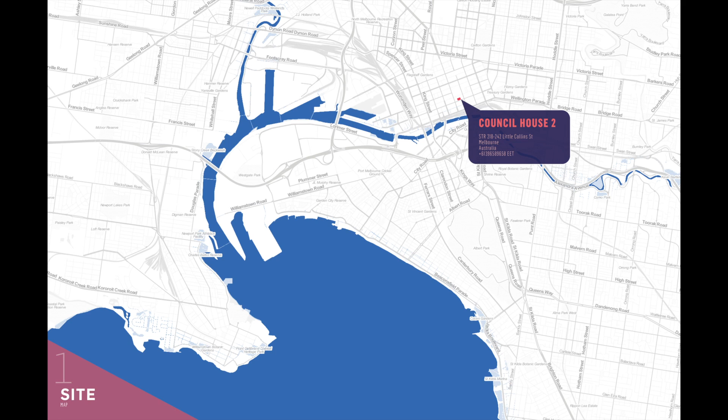Council House 2 is geographically located on the southern coast of Australia. It is located 40 miles away from the Southern Ocean. The building is also in the heart of Melbourne City Centre. It is in an area of Melbourne in Victoria, Australia.

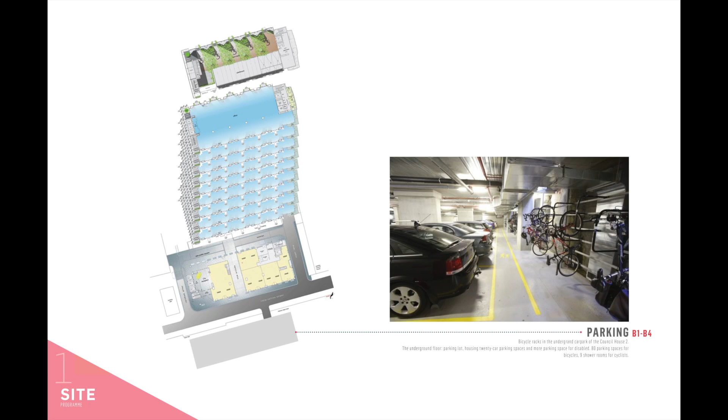The underground floor is programmed with a parking lot, housing 20 car parking spaces and 1 parking space for disabled, 80 parking spaces for bicycles, and 9 shower rooms for cyclists. Retail stores and lobbies are located on the first floor. The second to the 10th floor is Government Workers' Office. There's a roof terrace on the top of the building.

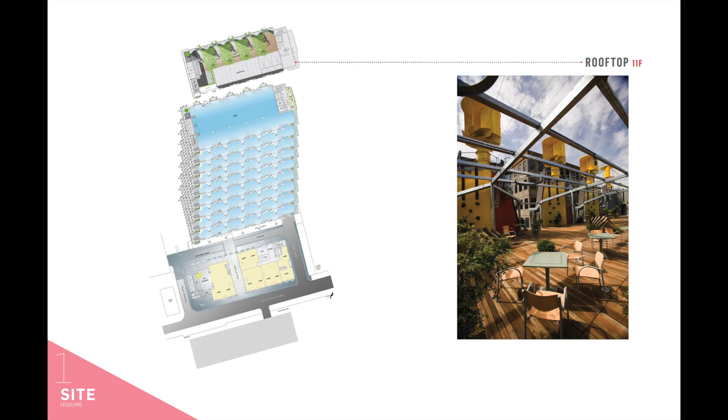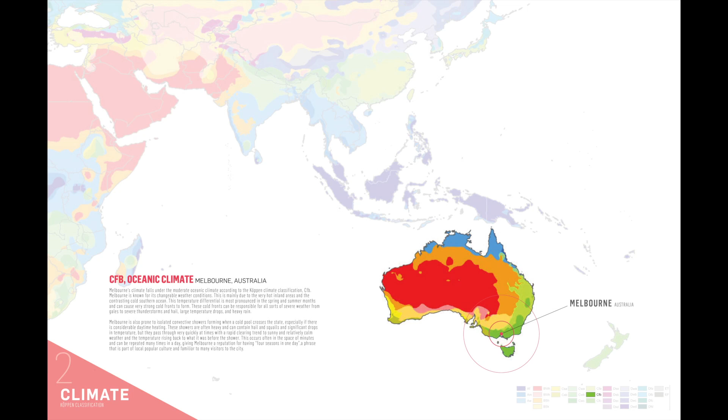Melbourne falls under the moderate oceanic climate according to the Köppen classification and is well known for its changeable weather conditions. This temperature differential is most pronounced in the spring and summer months and can cause very strong cold fronts to form. These cold fronts can be responsible for all sorts of severe weather, from gales to severe thunderstorms and hail, large temperature drops, and heavy rain.

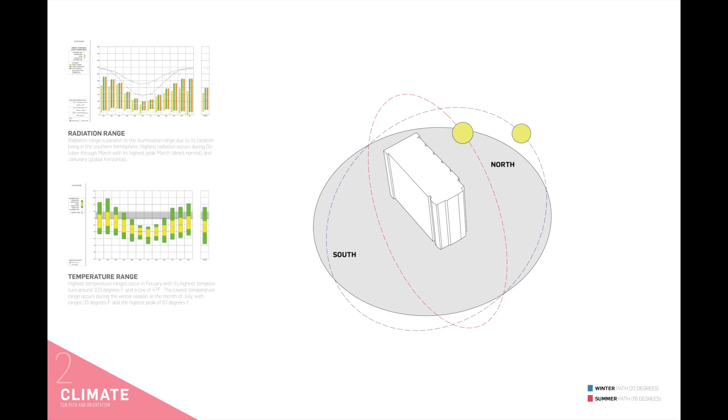These showers are often heavy and can contain hail and squalls and significant drops in temperature, but they pass through very quickly at times with a rapid clearing trend to sunny and relatively calm weather, and the temperature rising back to what it was before the shower. This often occurs in the space of minutes and can be repeated many times in a day, giving Melbourne a reputation for having 4 seasons in one day.

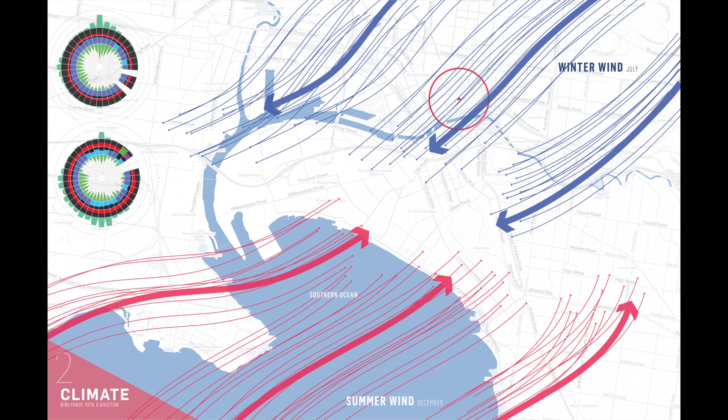The sun positions at 9 a.m. and 3 p.m. in Melbourne in midwinter. The wind direction is different by season. In winter, the wind comes from the continent, while in summer, the wind comes from the sea, from the south.

CH2 has been designed to be a highly energy efficient and sustainable building, with all its systems and spaces forming an interconnected and interrelated whole. Much like a living organism, the building requires all of its limbs and organs to fully function. The elements of the thermally efficient design concept for CH2 are stimulated by the termite mound.

In a termite mound, the cool wind is drawn into the base of the mound via channels, and the coolth is stored using wet soil. As the air warms, it flows upwards and out of the mound via chimney. The termite mounds are able to keep a stable temperature within, allowing the termites an ideal temperature for harvesting despite the large variations in temperature outside.

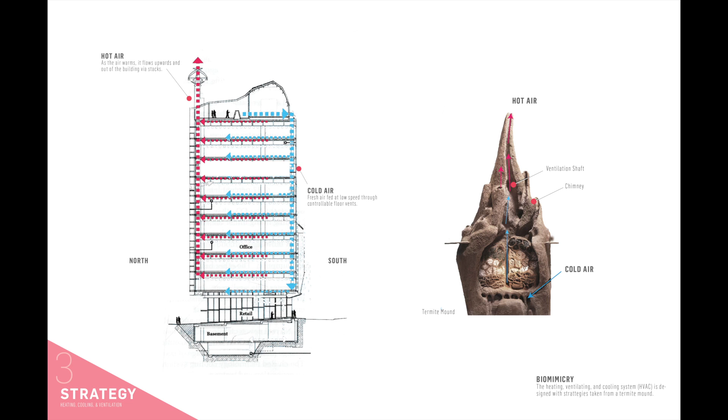In CH2, the cold air is drawn into the building via south stacks. The coolth is stored in the mass ceilings. When the air is warmed, it is drawn outside via the north stacks.

The horizontal as well as the vertical form of CH2 was developed by the example of skin, composed of epidermis, the outer skin, and dermis, the inner skin. Conceptually, this notion developed into the facade, becoming analogous to an inhabited skin or a traditional veranda. The epidermis translated to the outside zone to house the stairs, lifts, ducts, balconies, sunscreens, and foliage, with the inner line defining the extent of the fire compartment.

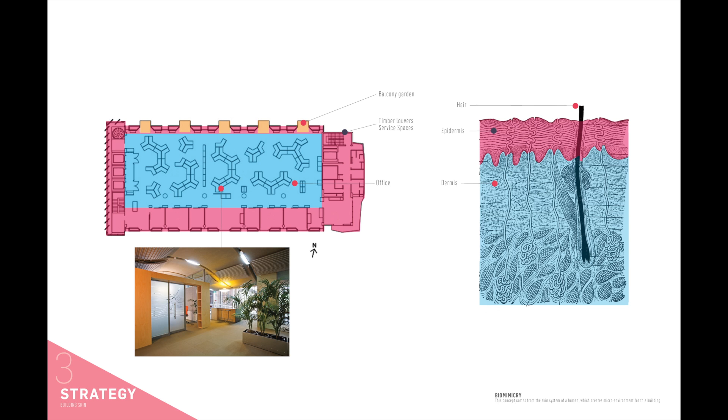All structures within the dermis were to remain lightweight and steel-framed. The outer epidermis, compared to the hair of the skin, provides the microenvironment, including the primary sun and glare control for the building, while helping to create a semi-enclosed microenvironment for the user's outlook.

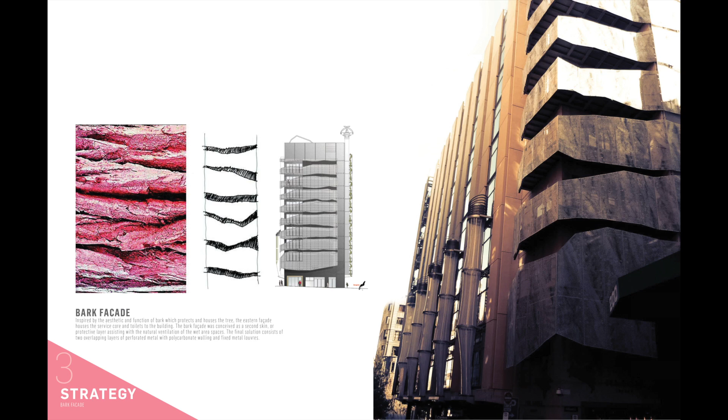Inspired by the aesthetic and function of bark, which protects and houses the tree, the eastern facade houses the service core and toilets to the building. The bark facade was conceived as a second skin, or protective layer, assisting with the natural ventilation of the wet area spaces. The final solution consists of two overlapping layers of perforated metal with polycarbonate walling and fixed metal louvers.

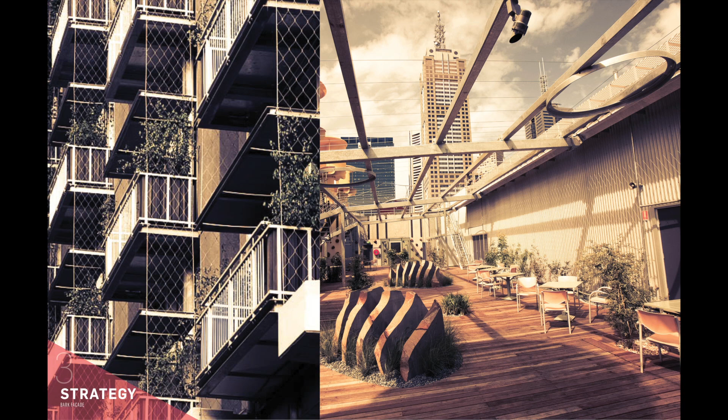Another innovative concept of the design of CH2 is the provision of the same amount of foliage on the building as would have been present if the site was still in its original natural vegetated state. The roof garden, together with the planter boxes on the northern facade, meets this aim and provides a microclimate for various building spaces. The roof garden is a large space for use by the staff in the building as a breakout space and for recreation.

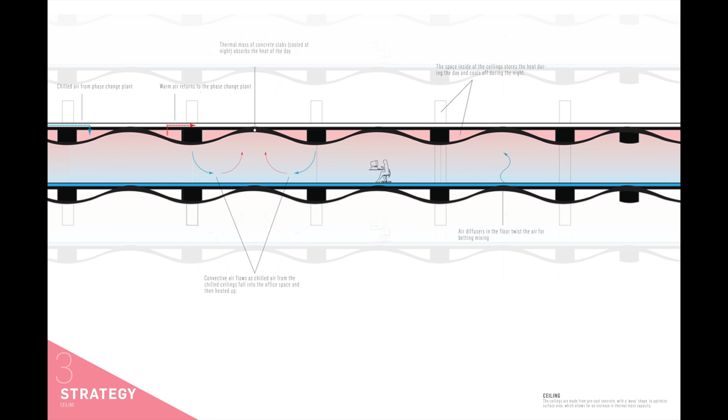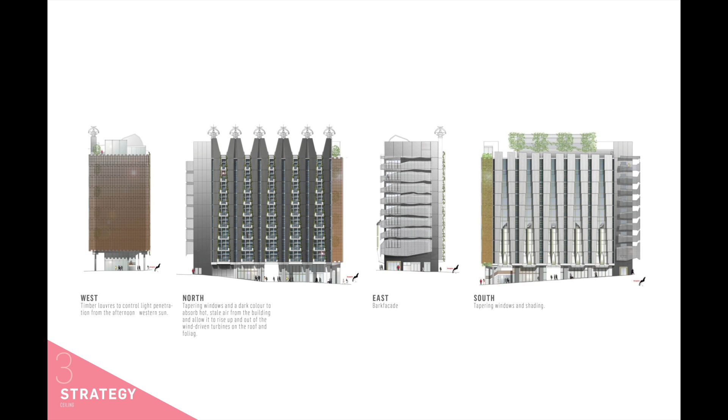The passive and active climate control system is highly integrated with the building structure systems, especially the vault ceilings. The Council House 2 also has a very comprehensive and effective facade strategy, which contributes to the climate control and lighting.

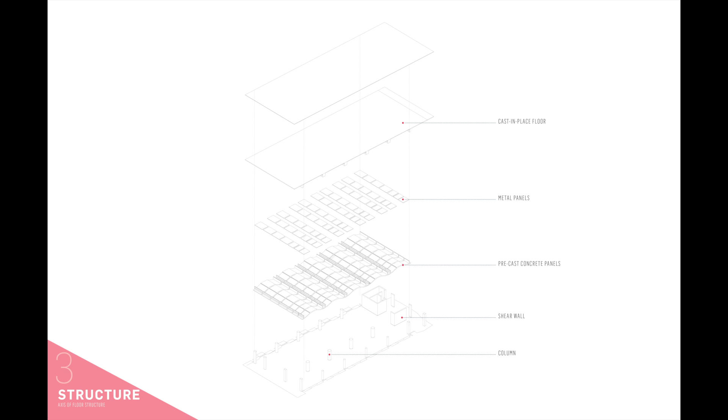This diagram shows the system of a typical floor of Council House 2. The columns and shear walls provide vertical support. Then, a vaulted precast concrete panel is placed on top of it. Metal panels are used to cover the gaps between the panels, and then the upper floor and beams are cast on top of it. The shear walls, assisted with columns and beams, form the main structure of CH2.

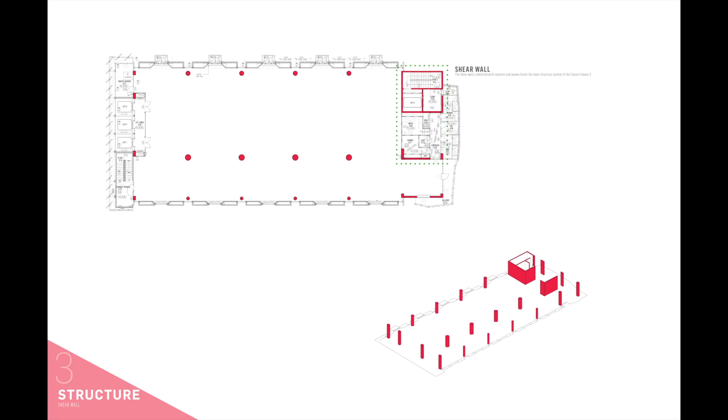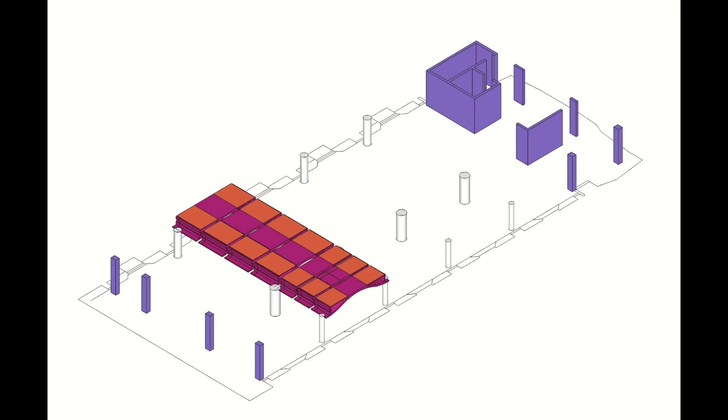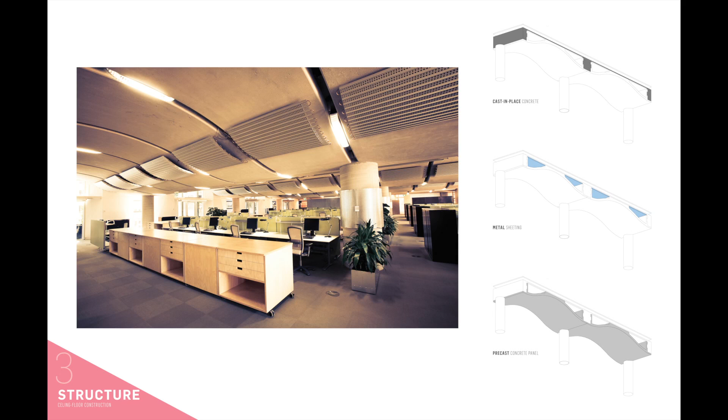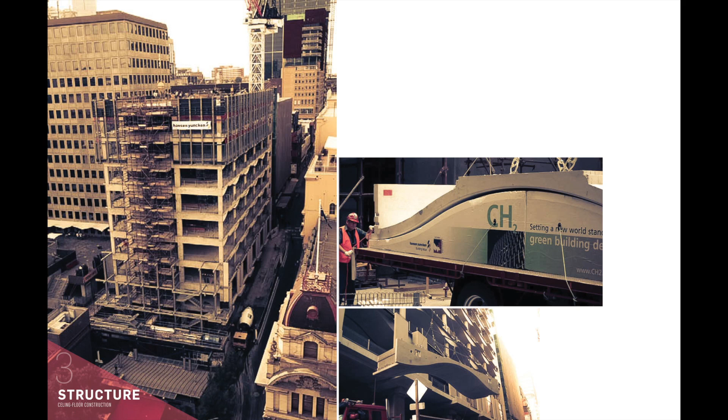The ceilings are made of precast concrete with a wavy shape to optimize surface area, which allows for an increase in the thermal mass capacity. Fresh and cool air comes from the diffusers in the floor and chilled beams. The space inside the ceilings and also the thermal mass of concrete slabs store the heat at day and cool at night. The air is warmed in the office space and then returns to the north stacks via the hollowed ceiling panels.

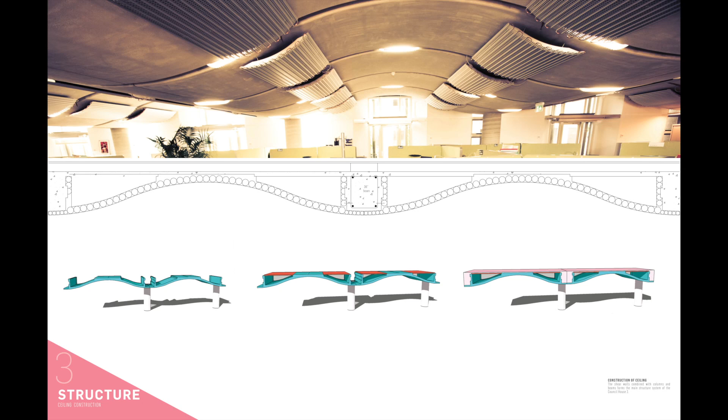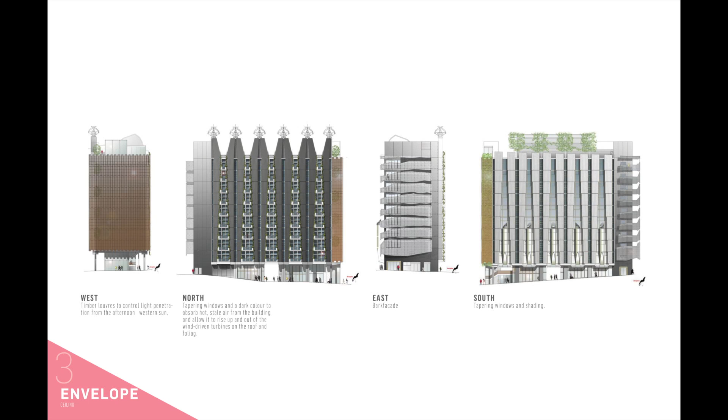The strategies for the 4 facades are all distinctly different. From left to right, they are west, north, east, and south facade. The western elevation is bioclimatically responsive to the direct sunlight falling on the facade. The facade is controlled by the building management system, informed by a solar clock and the weather station on the roof.

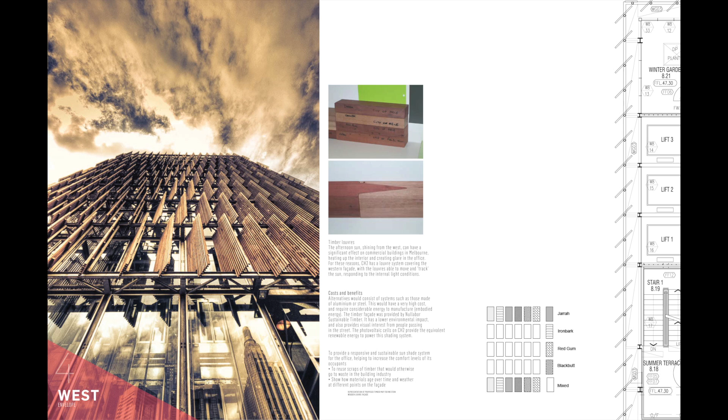The facade movement is controlled by the building management system with a software program set to the sun's movement throughout the year, for example, a solar clock. This automated system provides the ability to optimize the lighting-cooling balance, including dealing with difficult low sun angles in winter. On the southern facade, tapering windows are designed to avoid heating on the upper levels.

There are also several shower towers on the south facade. As the water droplets fall within the shower tower, they evaporate slightly, which uses up energy. This process gradually cools the water droplets as they fall. The water sprays into the plaza on the ground floor for cooling the space.

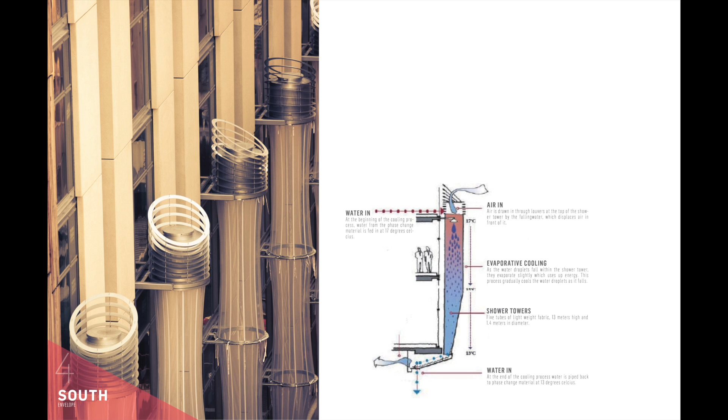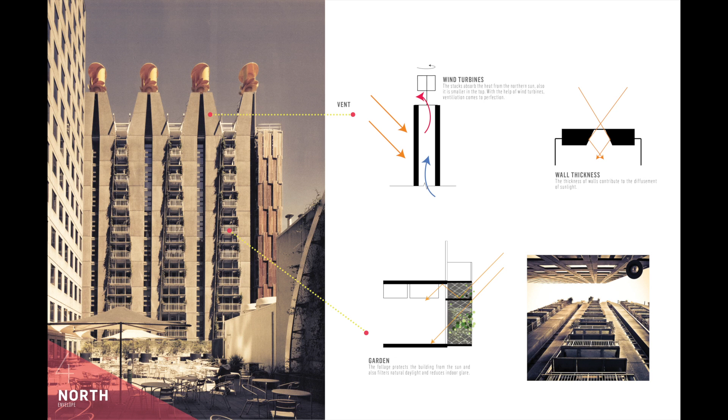The northern envelope consists of ventilation stacks and balconies. The stacks are smaller with wind turbines on the top. Also, they absorb the heat from the northern sun. All these characteristics contribute to perfect ventilation. In addition, the thickness of the walls contributes to diffusing the sunlight. The foliage in the balconies protects the building from the sun, filters sunlight, and reduces indoor glare.

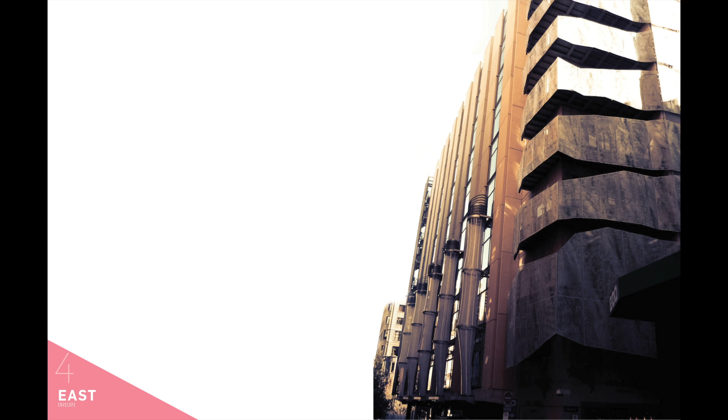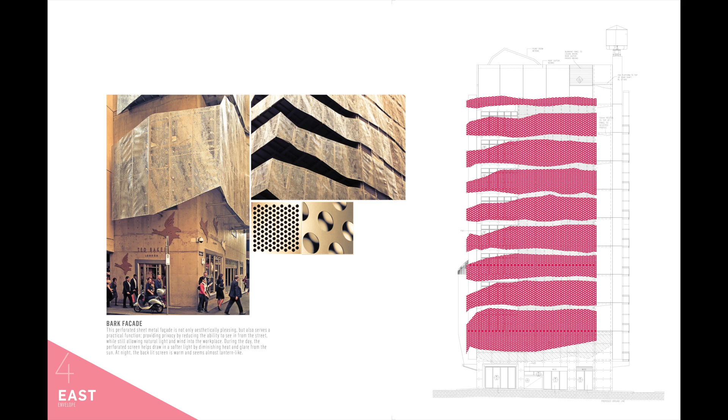This perforated sheet metal facade is not only aesthetically pleasing, but also serves a practical function, providing privacy by reducing the ability to see in from the street, while still allowing natural light and wind into the workspace. During the day, the perforated screen helps draw in a softer light by diminishing heat and glare from the sun. During the night, the backlit screen is warm and seems almost lantern-like.

The climate control system of Council House 2 is quite smart and effective. Its working mode responds differently and effectively during the day and nighttime.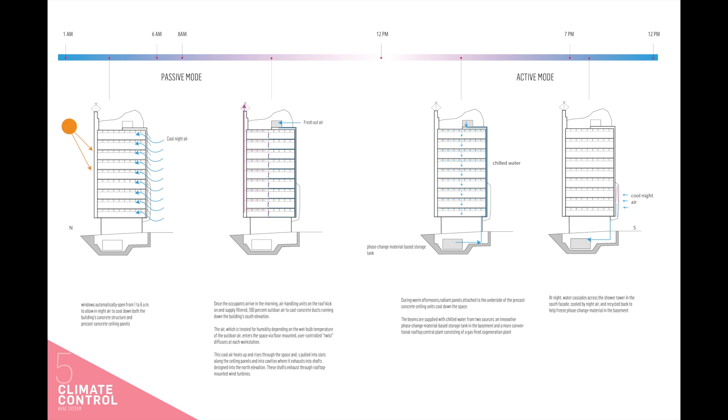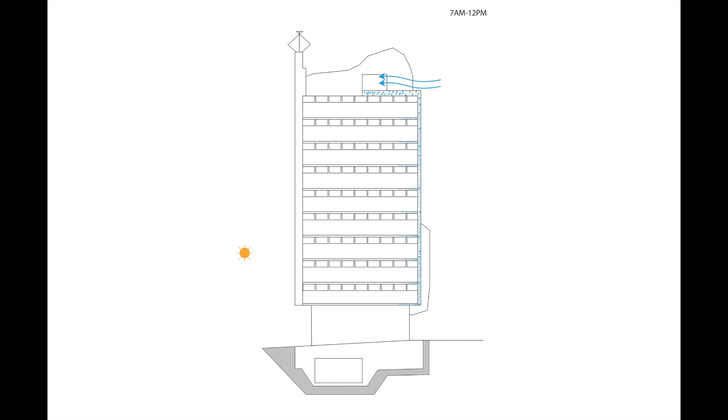In the early morning from 1 to 6 a.m., windows automatically open to allow in night air to cool down both the building's concrete structure and precast concrete ceiling panels. The coolant is stored in the thermal ceiling panels. Once the occupants arrive in the morning, air handling units on the roof kick off and supply filtered 100% outdoor air to cast concrete ducts running down the building's south elevation.

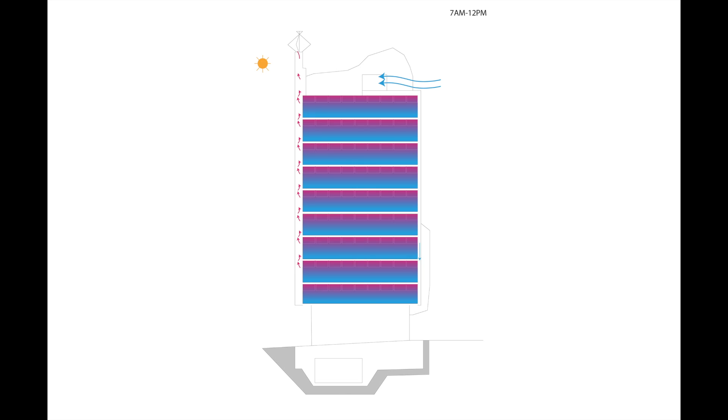The air, which is treated for humidity depending on the wet bulb temperature of the outside air, enters the space via floor-mounted, user-controlled twist diffusers at each workstation. This cool air heats up, rises through the space, and is pulled into the slots along the ceiling panels and into cavities where it exhausts into shafts designed in the northern elevation. These shafts exhaust through rooftop-mounted wind turbines.

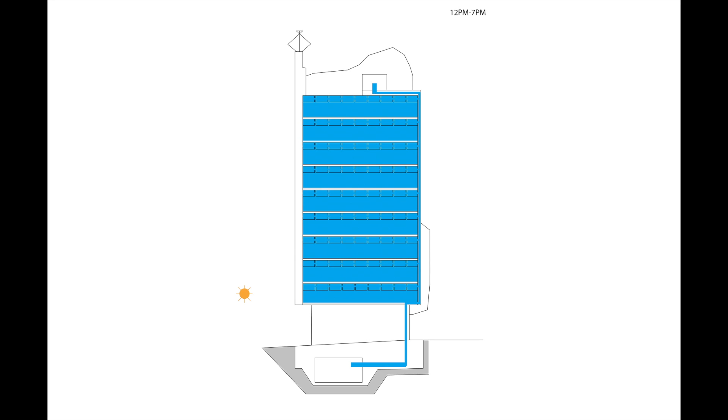This combination of night flushing, thermal mass, and mechanically supplied fresh air has been more than enough to keep occupants cool the entire morning and on milder days well into the afternoon. During warm afternoons, radiant panels attached to the underside of the precast concrete ceiling units cool down the space. The beams are supplied with chilled water from two sources, an innovative phase change material-based storage tank in the basement, and a more conventional rooftop central plant consisting of a gas-fired cogeneration plant.

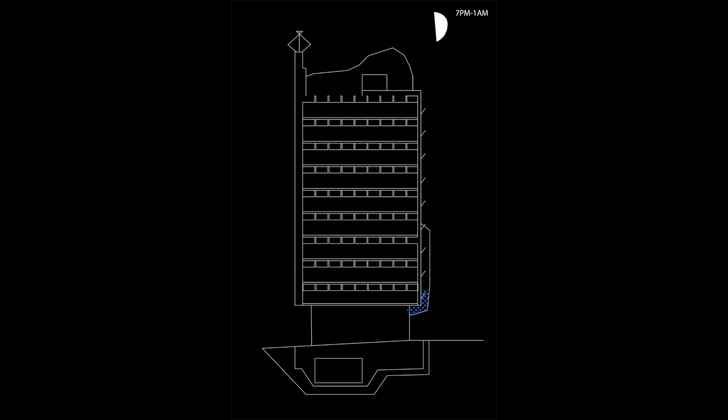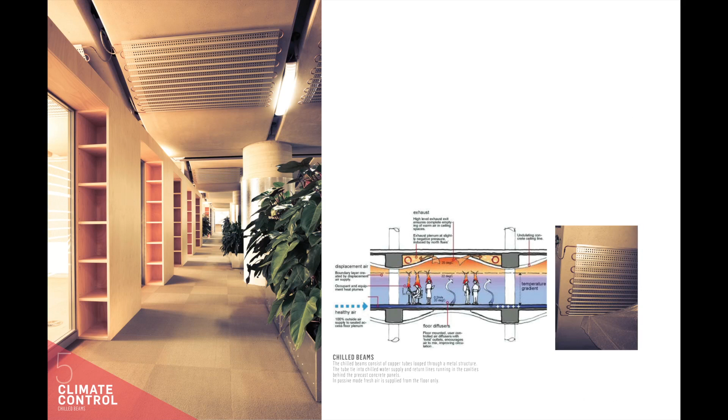During the night, water cascades across the shower tower and the south facade, cooled by night air and recycled back to help freeze phase change material in the basement. This is the mechanical detail of the climate control system. The vaulted ceiling provides relatively large space, and in this way, it can store more coolant at night and heat during the daytime. It can also duct the waste warm air to the stacks on the north facade.

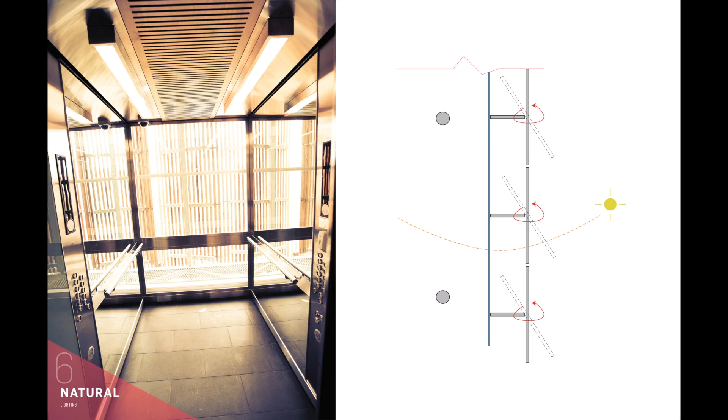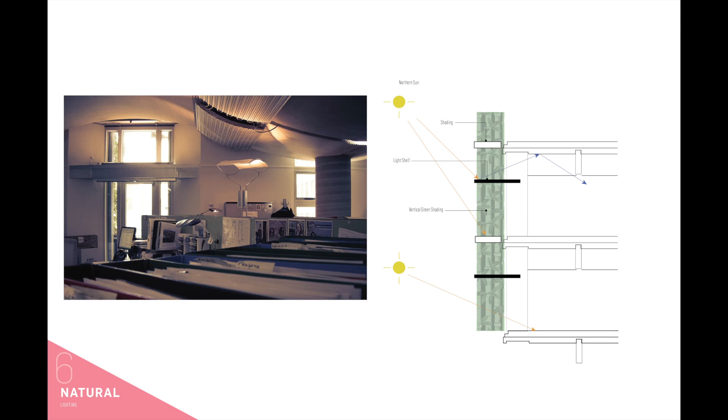On the west, the louvers are designed to control the light. In the afternoon, they are closed to block the western light. During the rest of the day, they're open to let the air and light in. In the northern facade, the green balcony provides the shading, while the light shelf also protects the building from sun glare. It also bounces the light into the ceiling, and the light comes into the interior from the gap between the undulating concrete panels. On the facades, the terrace, green balcony, and the stacks cast shadows.

One of the central principles of the ecologically sustainable development framework is to reduce energy consumption. Using daylight effectively as a primary light source in office spaces goes a very long way towards meeting this goal. Based on recent research, in the longer term, working predominantly under artificial light can have negative physiological and psychological impacts on our biological clock and natural health.

The CH2 has a highly integrated system. The structural and enclosure systems are connected. The structural and passive climate control systems are united. The structural and artificial lighting systems are meshed. The structural and natural lighting systems are united. The enclosure and the passive climate control systems are united.

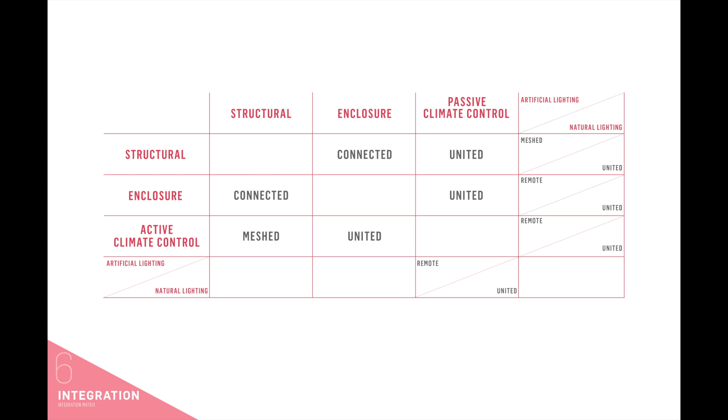The enclosure and artificial lighting systems are remote. The enclosure and natural lighting systems are united. The active climate control and structural systems are meshed. The active climate control and enclosure systems are united. The active climate control and artificial lighting systems are remote. The active climate control systems and the natural lighting are united.

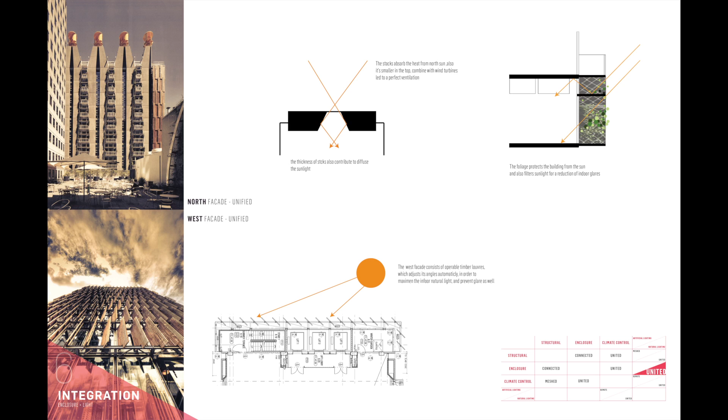The western envelope is unified with the lighting system. The operable timber louvers, which adjust their angles automatically, maximize the indoor natural light and prevent glare as well. The northern facade is unified with the lighting system because the foliage in the balconies protects the building from the sun.

The northern envelope is unified with the climate control. The stacks absorb the heat from the northern sun and heat the inside air, thus improving the ventilation via the wind turbines. Also, the southern envelope is connected with the climate control. The shower towers, which cool the recycling water at night, are anchored at the southern wall.

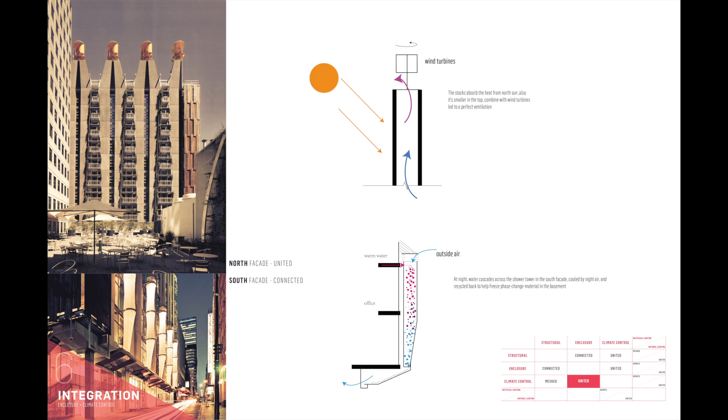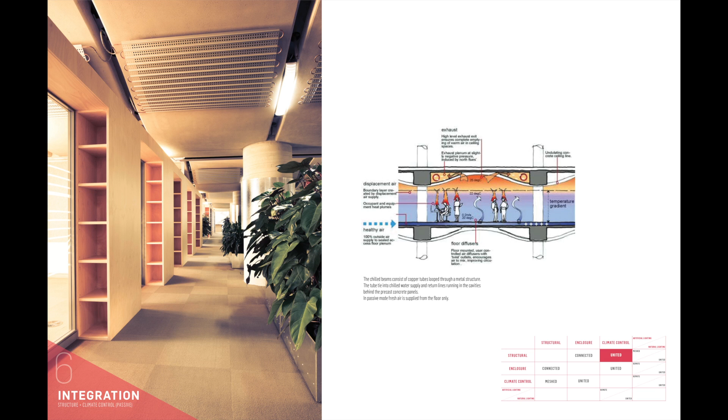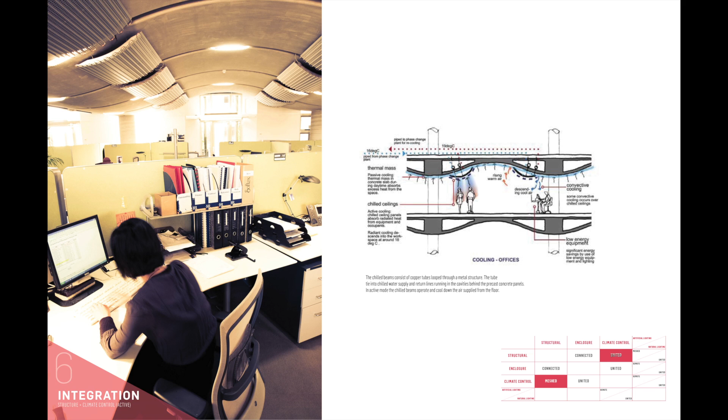The vaulted ceiling panels are also effective in the passive climate control. Fresh air supply from the floor rises up into the ceiling. The volume provided by the vault stores the air rising up from the floor and naturally leads the air that goes up. The chilled beams are meshed with the ceiling. The tube ties into the chilled water supply, and the return lines run in the cavities behind the precast concrete panels. In active mode, the chilled beams operate and cool down the air supplied from the floor.

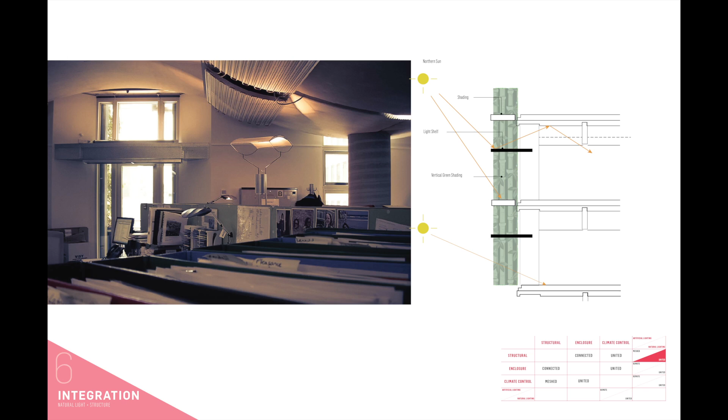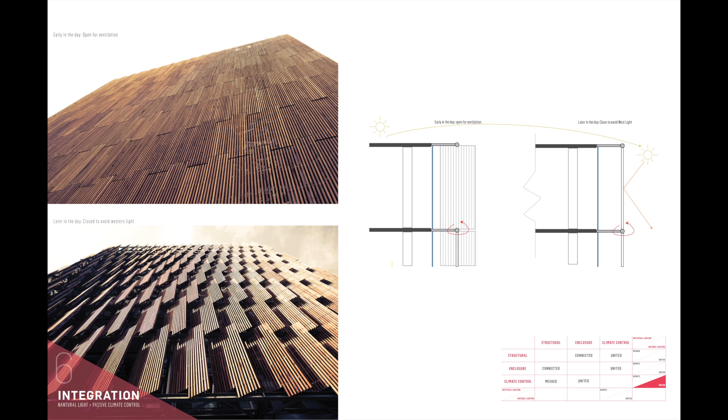The natural lighting and structures are unified. The undulating concrete panels on the ceiling, as a part of the structure, also play important roles in the lighting. The north light is bounced into the ceiling first and then bounced back into the interior. Artificial light and structures are meshed. The lamps are installed between the concrete panels. The natural lighting and passive climate control systems are unified. The louvers in the west close in the afternoon to avoid western light, and this way, the interior temperature is not going to be too high.